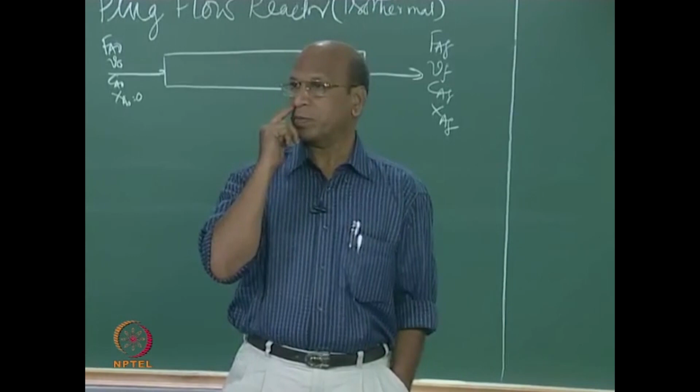Point 931 meter cubed. 1.5. How are you able to manage different answers for the same question? All the data is exactly the same. Huh? So great, I say. Even science is not exact. We thought only God is not exact, because it can be described by anyone in any form. But science, at least, we thought one can define exactly. Right? Newton's law, whether you do IIT Madras, IIT Bombay, or IIT Kanpur, it is same. It should not change. So, but I think here, what is the problem?

Correct answer is around 7 meter cubed. 7 meter cubed. Yeah, so you thought it is a very large value and then you did it. So you thought so like that? Okay, yeah, check again. I think the correct answer will be around that. It is of course a slightly complicated problem.

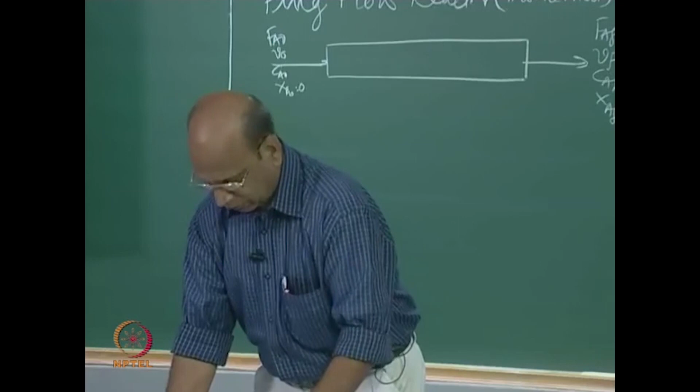It is a reversible reaction, and also there is the other timing and all that you have to add. I think you will get the reaction time. How much reaction time did you get, by the way? Yeah, I think around 5000 seconds is the correct answer. Yeah, around 4920 seconds. Yeah, still you manage such a low value.

If the reaction time is right, you only have to add another 1800 to the reaction time. 5000, around 5000 is okay. Yeah. Huh? That may be, I think, when you are taking that other value slightly this way or that way. Huh? Yeah, and then you have to add that 30 minutes, meaning 1800 seconds, or you can convert that into minutes and then add.

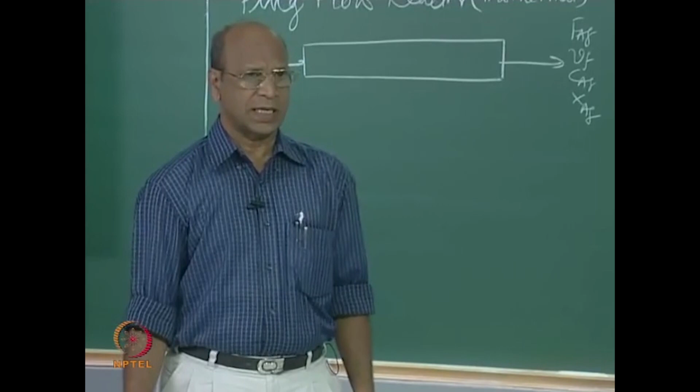So then divide by the total production rate, number of batches, and per batch, that is all. Correct, no? How many number of batches? That is too much, sir. What do you mean by too much? It's around 13 batches. Yeah, around 13 batches. Mass per batch. Then it becomes up to 100 tons per day, sir.

The answer should be 0.7. That is more logical. No, you again have the 30 minutes going and all that, no? Yeah, so, but I think that is the one. 7 meter cube, around 7 meter cube, you will get maybe 6.9, 6.8, like that. Try again. But the reaction time is right.

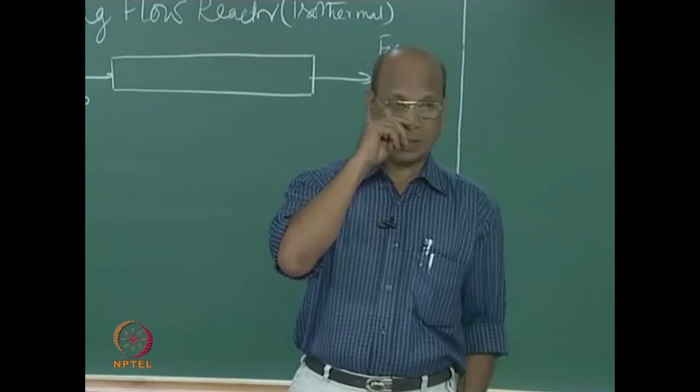I don't know how you have calculated the other things. Okay, reaction mixture density is also given. Where do you go wrong? It is probably you would have gone wrong where you have CA naught equal to, which is not equal to CB naught in this case. Okay. 13 batches also I got, but the value I am getting is 0.7, 0.74. 0.74 I am getting. I got it, but anyway, others I think, others also you try.

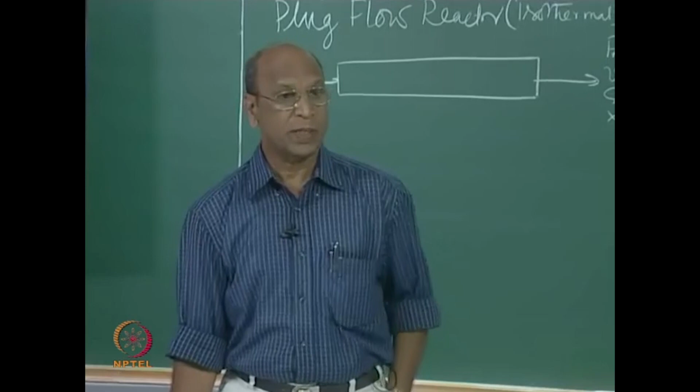I think many people, I know only 10 people would have done it. The remaining people would only be watching. Okay, I think you also do it, and then let us discuss later. Okay, so I got around 7, maybe wrong sometimes. Okay? Around 7 meters, 7 meter cube. Okay, good. Yeah, I think now let's come to the class.

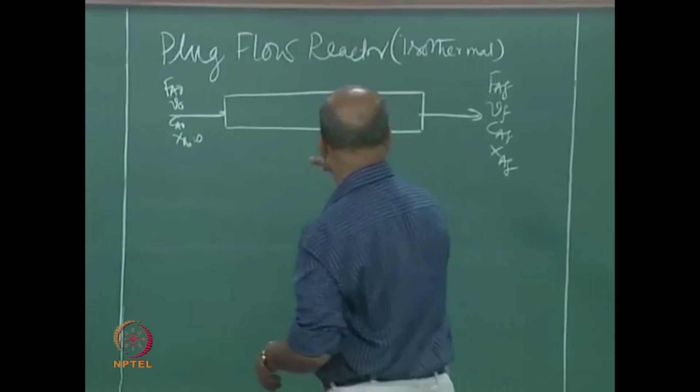Now present class, plug flow reactor, right? We have been discussing the concept of plug flow reactor, and I asked you, can you write 2 concepts in CRE? Right? That is one of the questions, the last question in that zeroth test, the first day when I gave that test. Okay, there was no answer. This is one of the concepts.

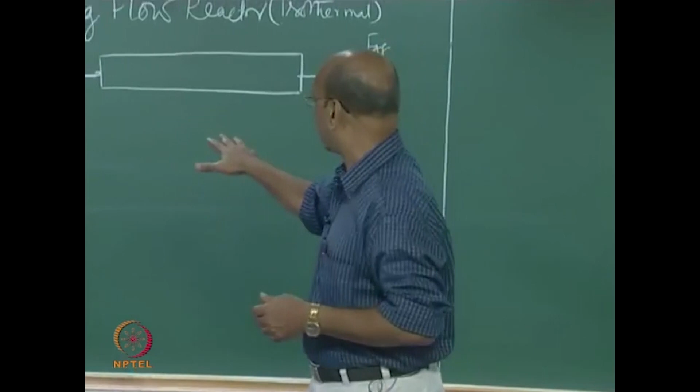Concept means something you imagine in your mind, and then based on that you develop all the equations, and then you try to find out whether your original assumption and the actual calculations are both the same or not. If both are same, then your concept is right, right. So this is one of the concepts in chemical engineering, and it is a beautiful concept, plug flow.

Why it is beautiful, I will tell you a little bit later. And we said that the basic definition of plug flow is... tell me. Flat velocity. Time spent by each and every molecule must be same. So then automatically you should have a flat velocity profile.

Now, I think you have a feel for what axial mixing means. Axial mixing is like pushing people in a queue backward and forward, okay. Like that, even in reactors, because of the turbulence, and you should not confuse turbulence with mixing. The turbulence in a pipe is very limited, in the sense that it is only velocity fluctuations which we take as turbulence, whereas mixing, there is turbulence too, but mixing is a big chaos.

Mixing occurs throughout the equipment, whereas in turbulence, when you have a pipe, I am talking about pipe flow. We have to distinguish that clearly, because we have two extremes: one is mixed flow reactor, the other is plug flow reactor. In our plug flow reactor, when there is a pipe through which flow is going, the turbulence we are talking about is velocity fluctuations.

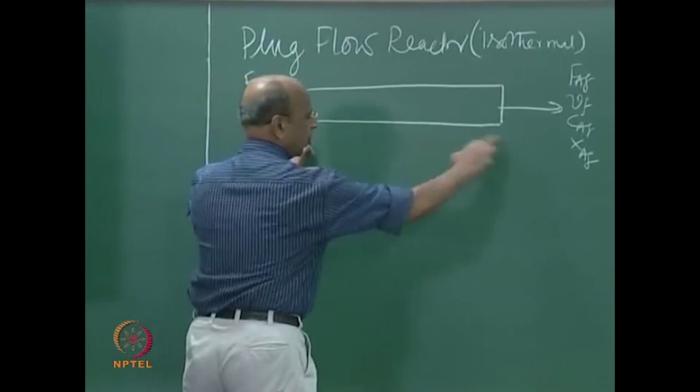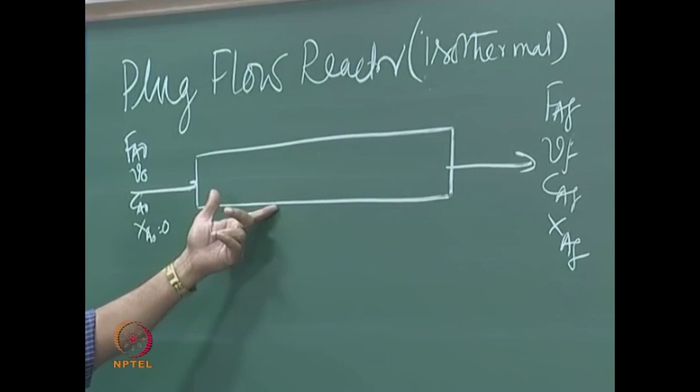Let us imagine you have provided 30 seconds for 99% conversion, for example. Around 10 seconds you will be at 1/3, but the conversion will not be exactly 1/3, it is not linear, depending on what kind of reaction you are talking about. So you will have some conversion, then afterwards again some conversion, then afterwards again some conversion.

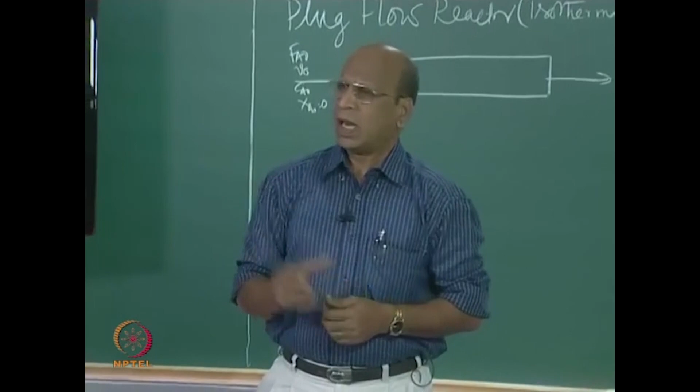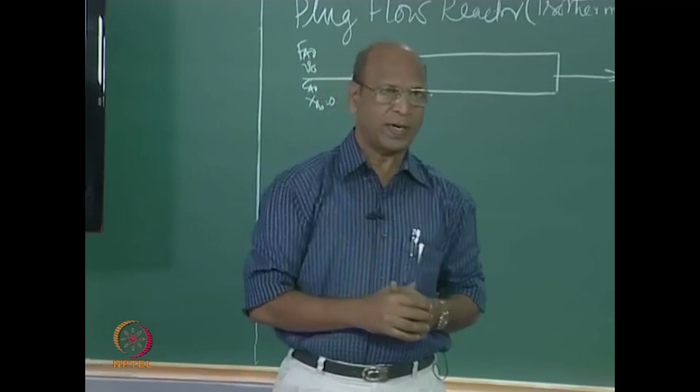But when I look at the cross section, you will have the same concentration at that cross section. That is why we say we have infinite mixing radially, and all of you would have assumed, definitely, and I think for your GATE examination also you would have prepared that infinite number of tanks gives you plug flow.

Really, did you understand that concept? Mathematically you can prove it, but has it really gone into your blood? Once it goes into your blood, only then the concepts will be with you all the time. What is our assumption? In the assumption itself you have that definition of infinite number of tanks giving you plug flow, just in the assumption, but we never go deeper into that assumption, correct?

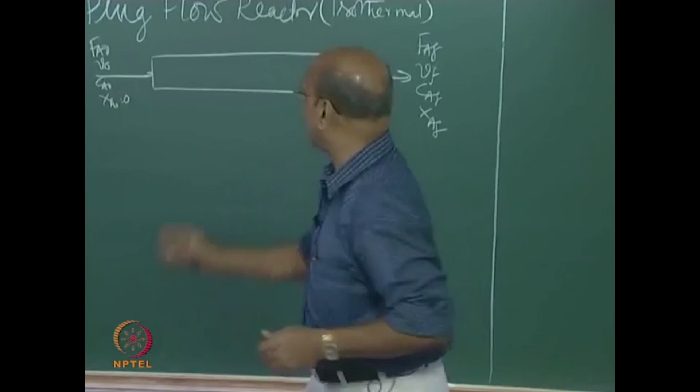So what is the assumption? At any cross section you have infinite mixing. When do you get infinite mixing? When you have one perfect mixer. How many cross sections do we have in this? That is all, that is why infinite number of tanks.

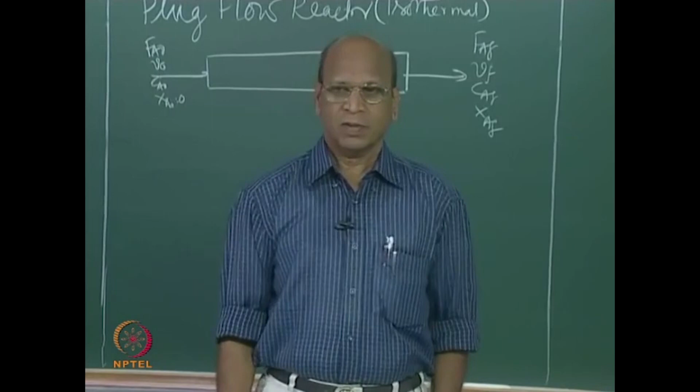Also, when you calculate for 90% conversion, plug flow gives this much volume, and for 90% conversion mixed flow reactor gives some volume, right. Now you want to use number of tanks in series. You calculate for one tank volume for 90% conversion, it will be much larger than plug flow. Then you take 2 tanks, what happens to the volume?

It decreases, to some extent, that we will also do as an example later. Then you take 3, it further decreases, you take 10, it becomes very small. When you go to infinity, that will be equal, the volume size will be equivalent to almost 0, where you are defining the radial length, the transverse direction, that radial dimension.

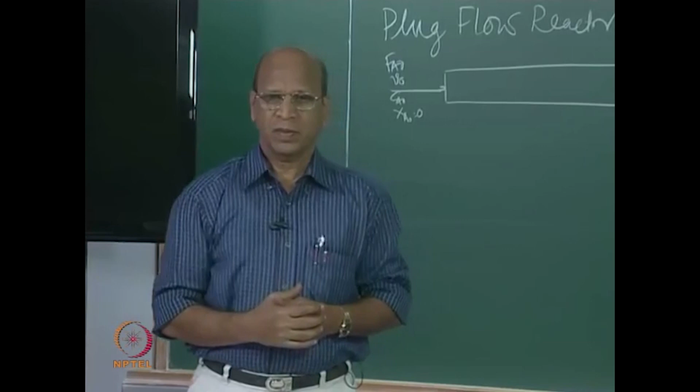You see how simple it is, I do not need any mathematics for that. This is a favorite topic for many examiners also to be given: prove that infinite number of tanks give you the plug flow equation.

You take first order and then write some equations and try to prove it. You do not have to really prove it, of course mathematically, since there are still some people who will not believe words. So that is why for them mathematics is required. Then you go for mathematical proof and say that yes, what I imagined and what I also mathematically proved, both are the same. You see how simple it is to remember now, very simple to remember.

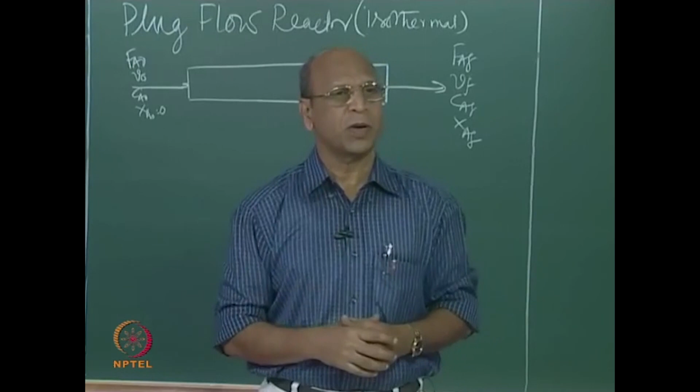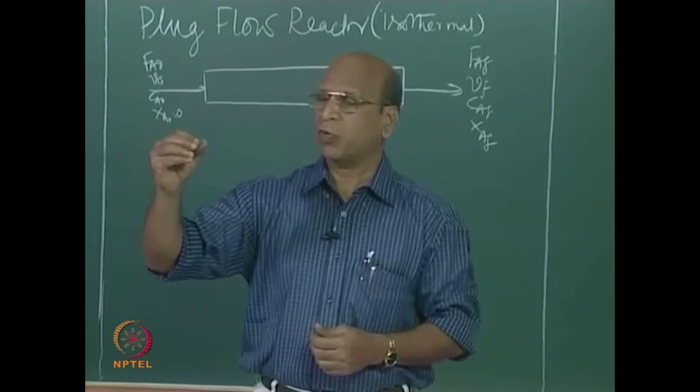Why should infinite number of tanks give you plug flow? It is in the definition itself. Normally we do not think beyond the assumption of flat velocity profile. If you think a little bit more, then it will be radial direction mixing equal to infinity and axial direction mixing equal to 0.

But I think I may give in the examination: prove mathematically that infinite number of tanks will give you plug flow, that is different. That is the mathematical examination, but conceptually it is very simple, because I am taking sufficient time, since the entire reaction engineering is based on only 2 reactors. Out of that, the second assumption, the mixed flow assumption, is very simple for easy imagination, whereas this one is not that simple.

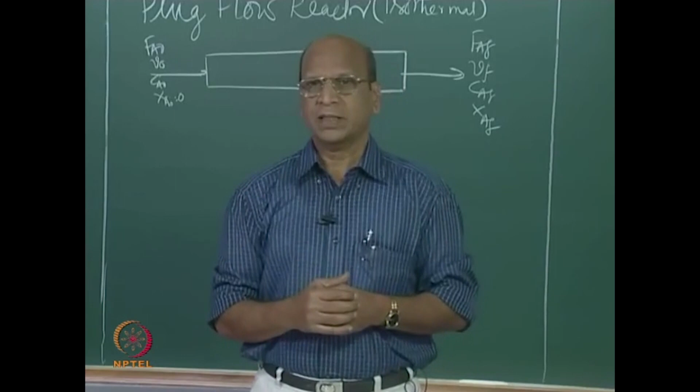Like parrots we repeat, because my teacher repeated that it must be flat velocity profile, I will also go and tell that it is flat velocity profile. Fortunately or unfortunately, if you become a teacher, you also tell the same thing, flat velocity profile. So generations it goes on as flat velocity profile without trying to understand the real concept, why this flat velocity profile should be for plug flow, because the idea is that each and every particle must spend exactly the same time. For that all these definitions are required: flat velocity profile, axial mixing equal to zero, radial mixing equal to infinity, all these things are required.

So that is why you have to do that, that is only your interest. I told you there is no description of real pleasure in learning, we cannot tell it in words. There are few things which you cannot tell in words. So that is why this joy of learning is totally different, you cannot express in words the joy of learning. And the moment you have that kind of learning in you, you should not get arrogant, but I think you will be happy with yourself.

Others may not be happy that much, but you yourself are very happy if you know many things. But that should not go to your head, and then you should not belittle others, scold others and all that. But still, I think that gives you, that is why, every god must be like that.

But we see a lot of movies, and many movies are there on Krishna. I told you I am not particularly religious on anything, I do not think all are equal for me, but as an example I am telling. So he knows what is going to happen, at least in the books, what has happened and what is happening. So that means he has got all the knowledge, and you can see how he will smile also very carefully. That smile will not be laughing like me, ha ha ha, he will never, Krishna will never, because other people will laugh like that, Duryodhana may laugh like that.

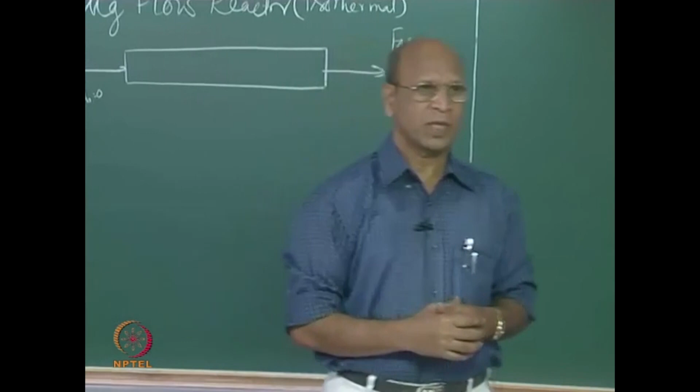We are only trying to draw some fraction of it, one millionth of it, from that source. If you really truly believe in God, I believe in nature, I think so. That is why what we are learning is all from nature, and the entire research is only to crack nature.

Just to find a small thing of what is happening, how clouds are forming, big problem, big research problem, how they move, why those shapes, they are not beautiful circles or beautiful triangles or rectangles, all different kinds of shapes. You look at a cloud and imagine that it must be a beautiful girl, it looks like a beautiful girl, or you look at it again and say it must be a beautiful bird, then it looks like a beautiful bird, because by the by we always say beauty with girls, we never say it with boys.

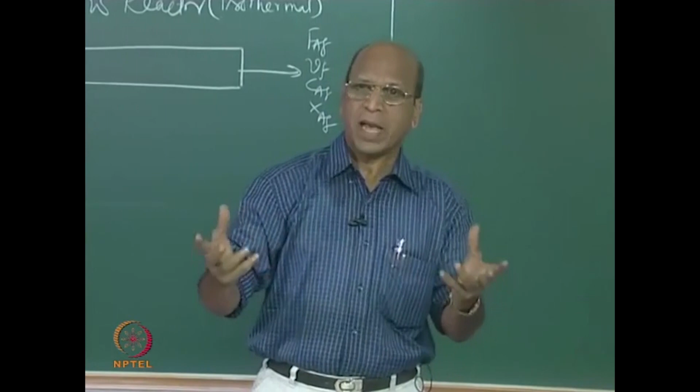You know the reason? I think on this planet it is totally different, human beings are totally different. If you take any animal, the male is very beautiful, only in humans the reverse happened. No, really, see the peacock for example, the male peacock is very beautiful. The lion, the male lion is really wonderful to see, that magnanimity, the moment you look at that, oh my God, lion. But if you see the female lion again, you don't feel that.

Every day you may be seeing, any animal which cannot see without the aid of light in the night, they will happily sleep after 6 o'clock, the moment dark comes. But that is the only time you start working.

We are also the same on this planet, life is the same. Life cannot be different because all species have come on this planet. About 90% of species only take food during daytime sunlight, and they don't do any other job. They search for food, and once they have sufficient food, they want to propagate their own species. Male and female join, and they simply propagate their species. You are chosen on this planet only to propagate your species.

If you allow humans, I think they will really pollute very fast. That's why all these restrictions are there - in China only one child, and in India it may come to half a child or something, because we are crossing China. But I think naturally they will control on their own, like other species, right?

I don't know whether you've heard the name Aris, Rutherford Aris. Has anyone read his book? If you read that, I will give you a Nobel Prize if you really understand it. Really, I think it's very very complicated. He has written the same information in terms of mathematics. But if you understand these concepts and go to Rutherford Aris's book, wonderfully you understand. His mathematical knowledge is fantastic.

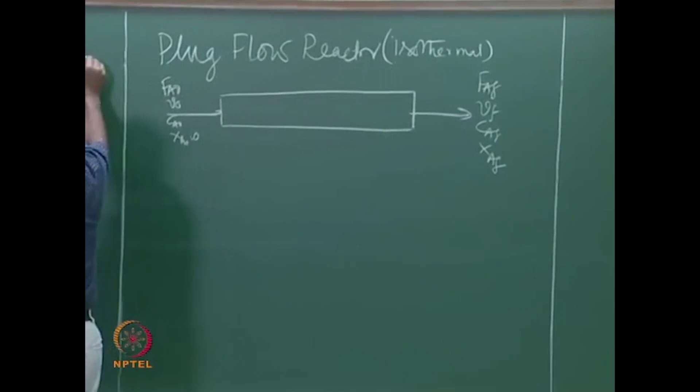I think even for conversion he uses the term xi, where most of us don't even know how to write this - you see, like this, that is xi. Xi is the conversion for him. We simply write xa, like this. What do you call that? Xi only, no? It's not epsilon - epsilon is only this, epsilon doesn't have a tail. Zeta - no, zeta is again different, it goes like this. They also have a capital form and a small form. Yeah, so I think this is xi.

That kind of complicated, but I think he is very stable, very good, and he writes poetry. Poetry comes when your mind is stable.

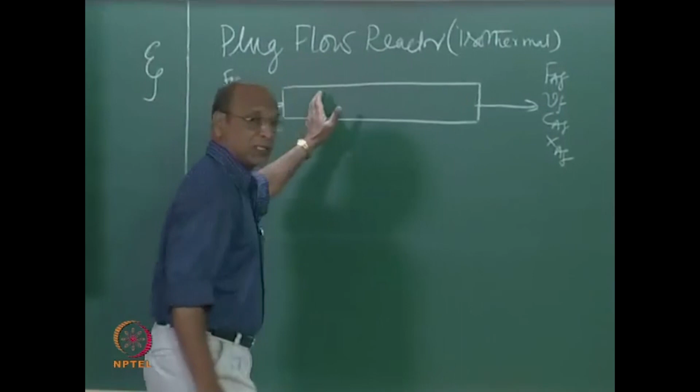Please remember that. Anyway, coming back - that's why I told you, all this started because of the pleasure in learning, that you have to taste. The moment you taste it yourself, you cannot come back. We say that you have that nectar, amrut. This will taste much more than amrut - this passion for knowledge, once you start enjoying the happiness of learning. Really, I am telling you, just try that. I don't know if even one person tries, I will be very very happy.

That is why our time is limited during our education, right? So in school you will learn something, but you don't understand. In university you learn also, but you have to do it with understanding. When that understanding comes, automatically it's fantastic - really very very happy. So for that, the only thing is you have to read and then try to understand. That's all. If you're not able to understand, ask friends, ask people, ask teachers, all that.

And you should not feel bad to ask anyone if you don't know something. If I don't know how to add 2 plus 2 equals 4, that means I really don't know that - so why should I feel bad? I can happily go and ask. That's why each and every individual is different, my learning capacity is different. You would have easily understood 2 plus 2 equals 4, I would have not. But I should not compare with you and say I can't ask because people will laugh at me.

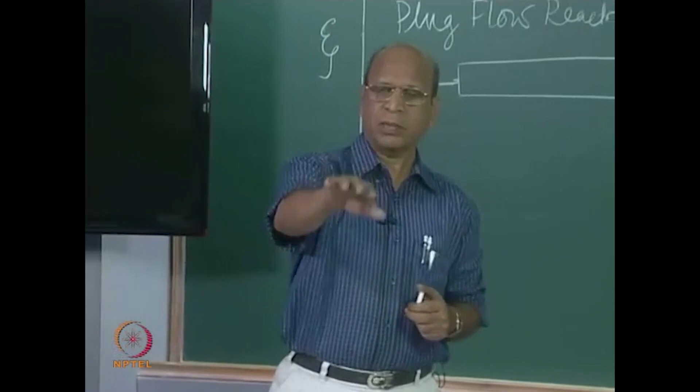You should not, because each individual is different. We say that after first class you should remember this, after second class you should remember that, after chemical engineering you should remember that, or mechanical you should remember that. These are all our own limitations that we put, but the brain will not accept that. It depends only on your capacity of learning.

And also one beautiful thing with the brain is any time you can learn. I think even a person about to die at 90 years, if he is interested in chemical engineering, he can still come and start with 'what is chemical engineering' and all questions, and then he can learn. The brain accepts that. It is not that beyond a certain time you cannot learn.

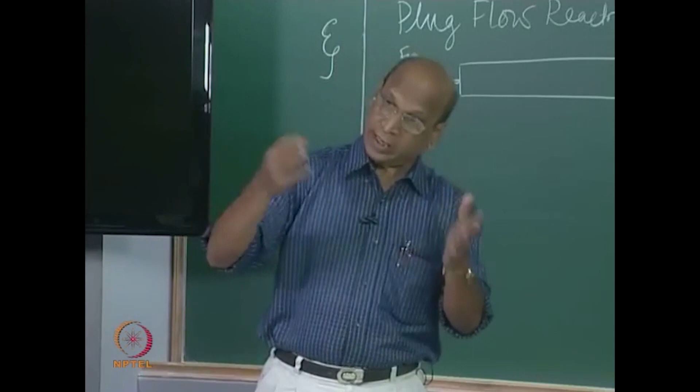That is the beauty with nature. Anytime you want to learn, you can learn - not just us, any species, otherwise you would not have survived. Learning capacity doesn't mean getting degrees, it means observing nature and trying to escape it, like when there's a tsunami, explosions, or lava from volcanoes. All species run the moment they see lightning and thunder - that is also a learning. If you don't learn and just stay there, thunder will char you, you'll become carbon, carbon 12, though I don't know its exact position in the periodic table.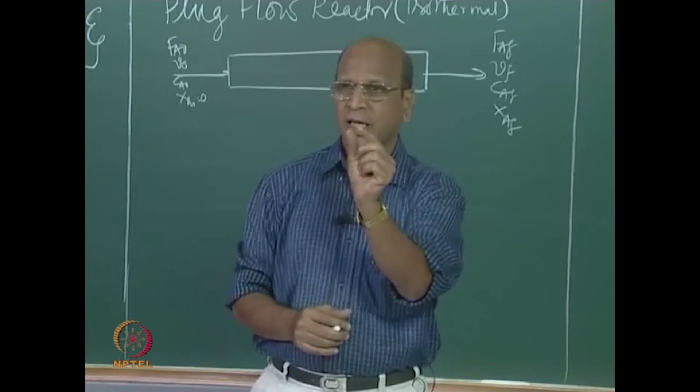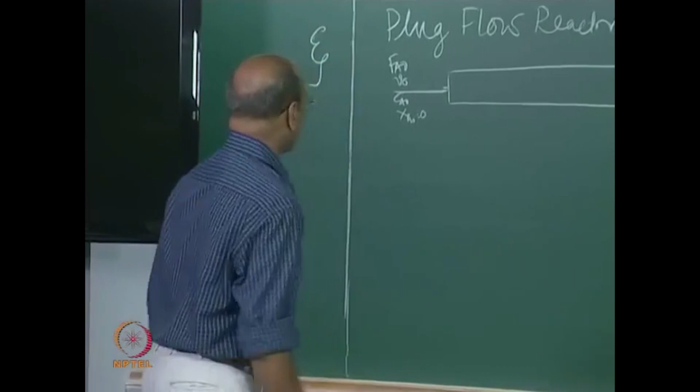I have various ways of introducing this color. One way is, imagine I have a tube, a 4 inch tube, and I take a disc of color - like a CD disc, not a hard disk, very small thickness, red colored. This is white, which is water flowing, and suddenly I introduce that red disc inside, which is totally soluble - soluble, not a hard disk. I know the total time is 10 seconds.

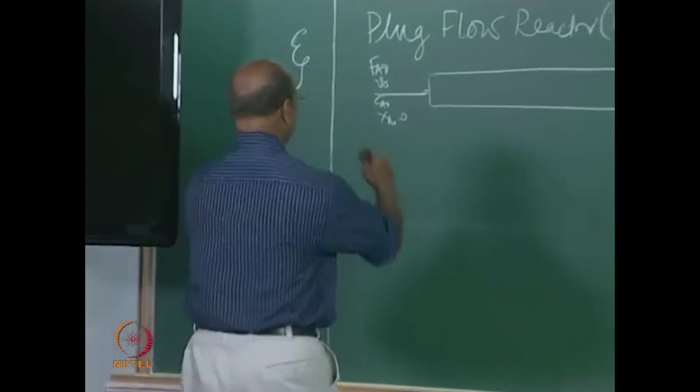How does this disc move inside as water is continuously flowing? By some imagination, I'll assume the disc suddenly enters the cross section, exactly fitting there - it's uniform cross section. Even though I've drawn it slightly bulked here and there, assume it's exactly the same cross section throughout. How does that move? It moves as such.

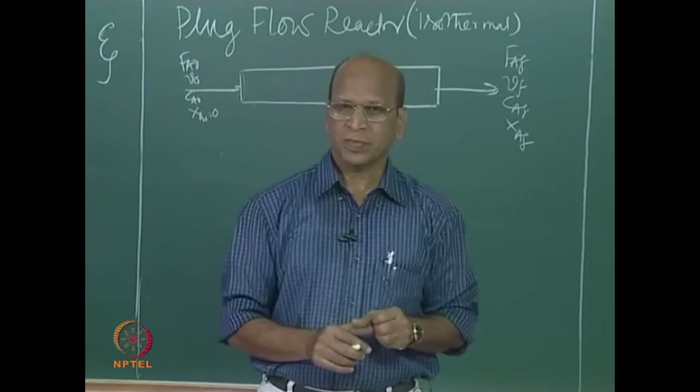Not able to imagine? Because this is water flowing - imagine a small thickness of that flow has suddenly become red. How does that move? It moves as such, like a disc, if it's ideal - and it is ideal, that's what we're talking about. How does it come out here? As a disc, exactly as a disc. That's the reason this is equivalent to your Dirac delta function.

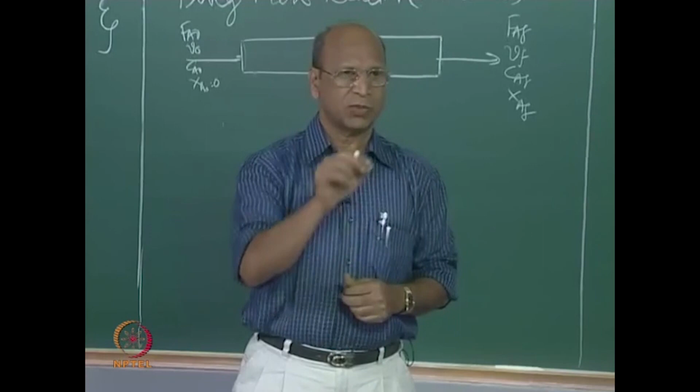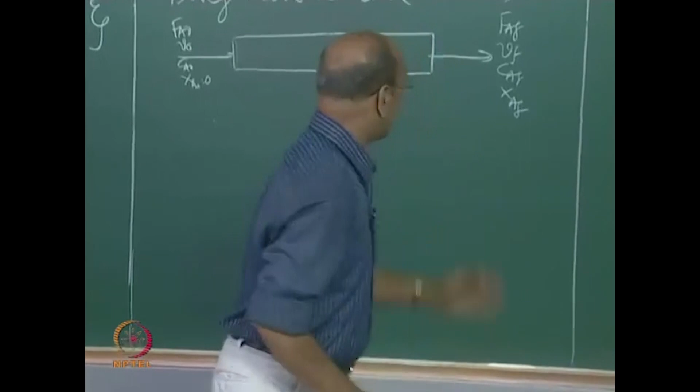That is what is called pulse input. Suddenly you introduce the pulse and observe at the end how you get this pulse. Even at 50% of the time, if you look midway, you'll see that red disc, and here it comes out. That is why we normally show the pulse entering like this and coming out the same way, not reversed. This is what is the Dirac delta function.

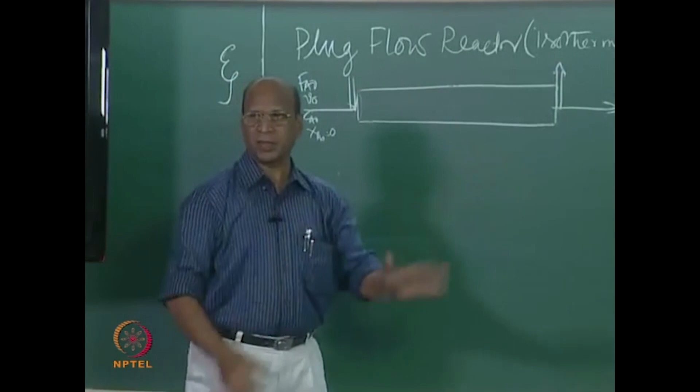This is also what I asked in another question for ideal reactors - plug flow and... what is the E(t)? For plug flow and mixed flow, what is the E(t)? This concentration can be converted into a more useful function called the exit age distribution function. Why is it useful? We'll discuss when we come to RTD. But for now, this is simple concentration.

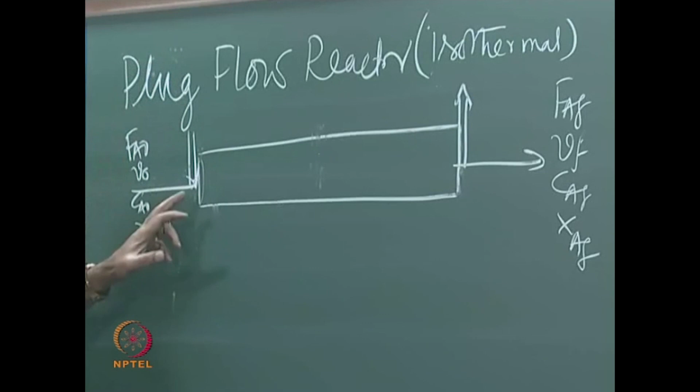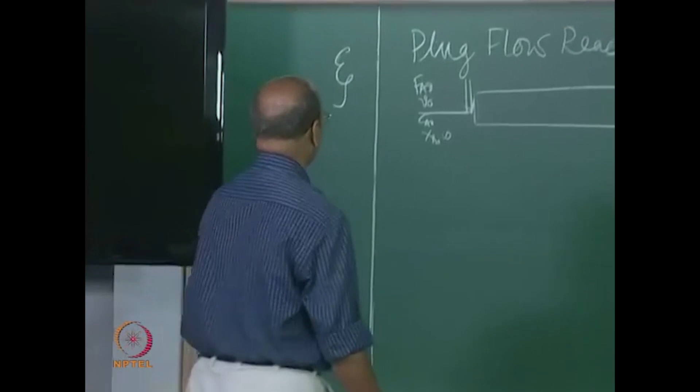Now pulse input - we've discussed this. Now let's say I have a step input. Step input means water is entering continuously, the color of water we know. Then I'll also have another stream of red fluid. At time t equal to 0, I switch off this valve, and another valve opens with exactly the same flow - no disturbances allowed. Then I allow this red fluid to enter and come out. What do you see at the end?

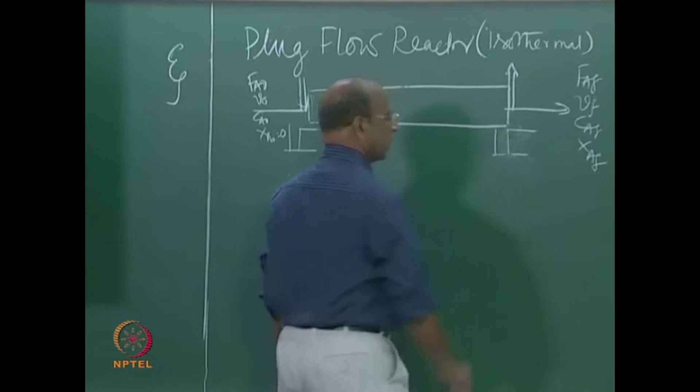After time equal to 10 seconds, you see only red fluid. That is step input - you have the step entering here, something like this, and also coming out exactly like that. So RTD is also very easy to imagine once you have this. But in reality, what happens?

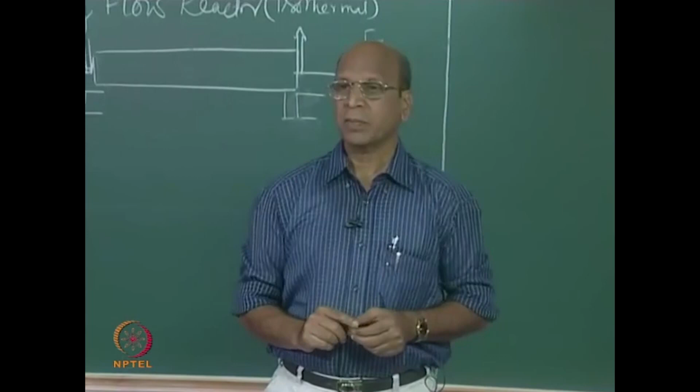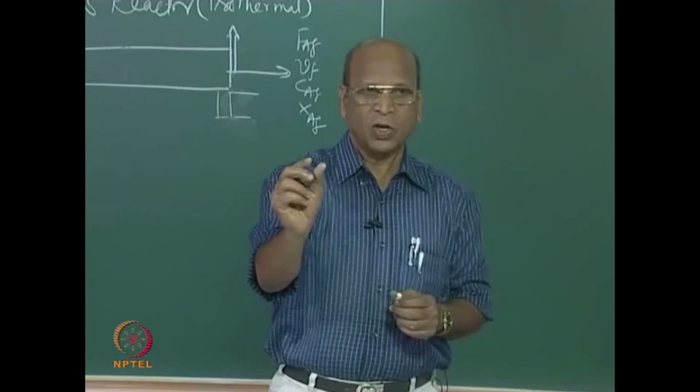In reality, we are talking about turbulence in pipes - that means turbulence in pipes is small fluctuations over the velocities. So what will happen to this disc when you have small fluctuations over these velocities? How does that spread? Because you have uniform concentration in this disc, right? So it is - more concentrated? When it comes out, will it be more uniform?

No, in the center there will be more. Center of what? Center of the pipe. Center of the disc, center of the disc. There is no pipe here, I think - it's just the reactor. If I looked at a small... okay, let me draw this.

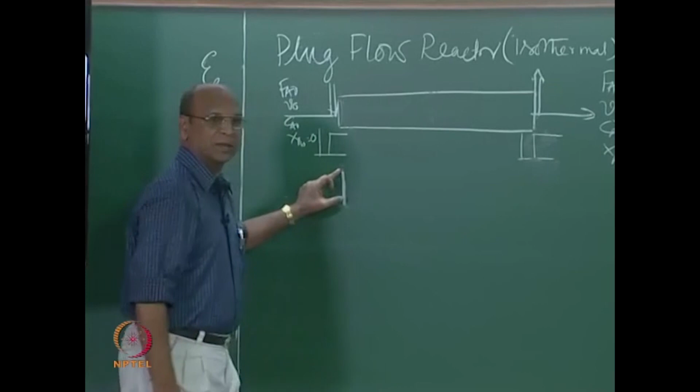This is the disc I am introducing. It should be infinitesimally thin, but if I draw it infinitesimally thin, you cannot see it, so I am drawing it with a little thickness. So the imagination is this: this is the disc which I have just entered, and this is uniform concentration throughout. When it is moving, there are velocity fluctuations around this. So how does that spread?

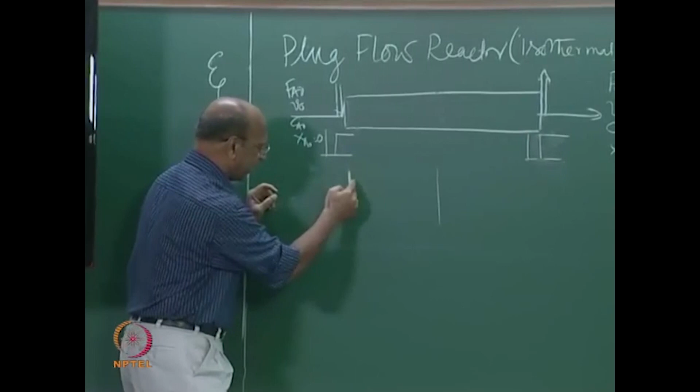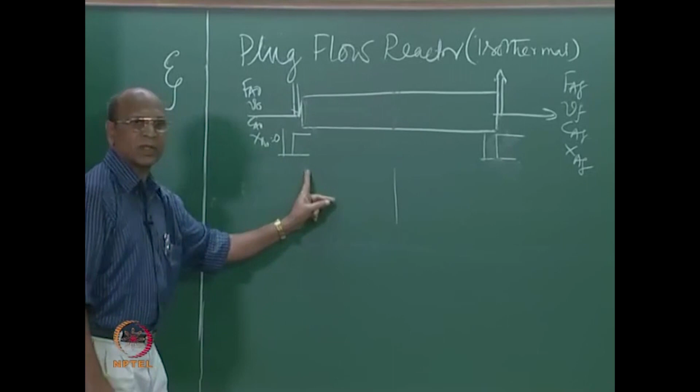How does that spread? See, what happens is the concentration at this point - because this side we have water, correct? When I imagine somewhere inside, this side we have water, but now it is moving with the velocity fluctuations. So from here to here when it comes, the concentration here is less and the concentration here also is less. So you will have

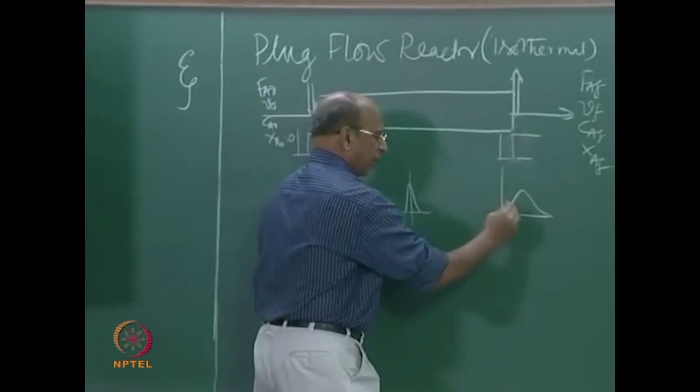like this - this is the concentration I am plotting. This is the concentration and this is the distance, the thickness of the thing. Now that pulse is slightly getting widened. So at this point it may go like this. That is what is residence time - this is the concentration, that's what we are talking about.

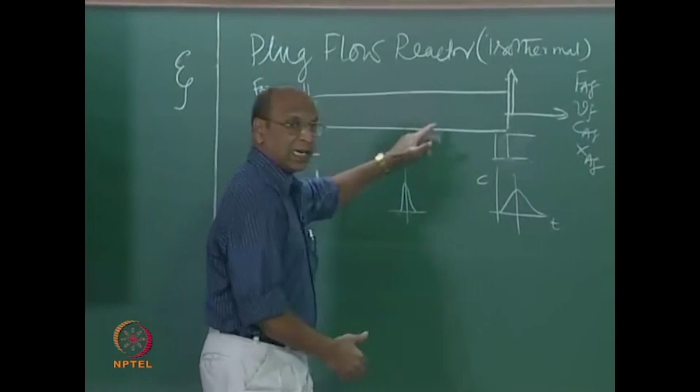If I now see this as time at this end, the molecules which are at the front portion when it is moving, those will come out first, then later the ones at the center, and later the ones at the back. That is the disturbance we have there - that is the spread in residence times.

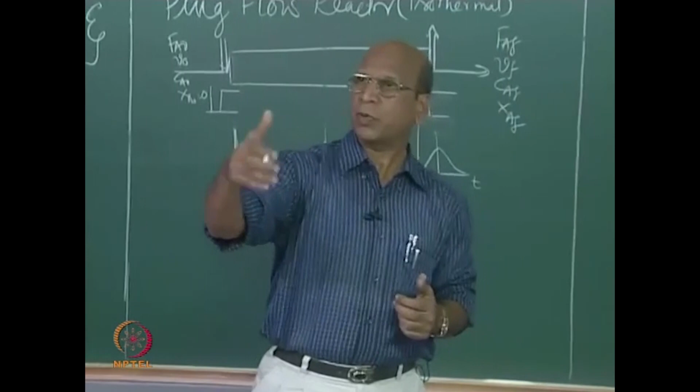I also gave you an example: when you have this kind of fluctuations, if the average time is 10 seconds, some molecules may come out in 8 seconds itself because of the fluctuations. I don't know if I gave you this example about the Tirupati queue - when you are about to see the god, you are just entering that main temple portion, then when someone pushes you, you are happy because you will just go and jump ahead before the god.

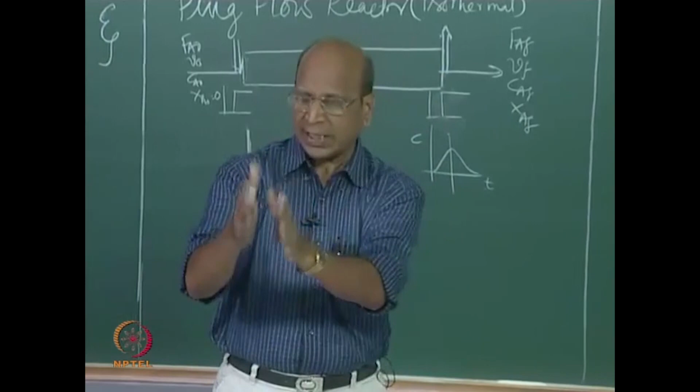That means he is able to see the god a few seconds before the person who was in line with him. He was in that line, but because of the forward-backward movement someone pushed him, so he moved forward - that is the exit for him. So he comes slightly earlier. That is why the molecules, if I have 10 seconds mean residence time, some will come in 8 or 9 seconds and some will come in 11 or 12 seconds, but that is a small disturbance.

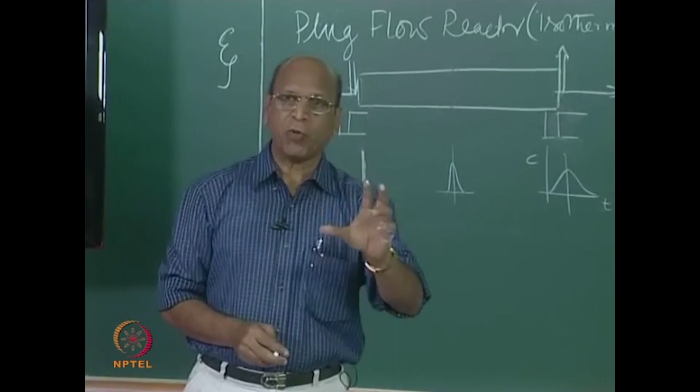That is a small disturbance, and in plug flow you will have only small disturbances because your velocity fluctuations are not large. If you have infinite velocity fluctuations,

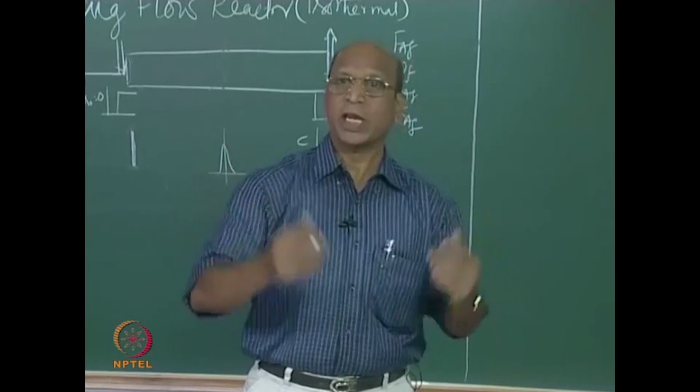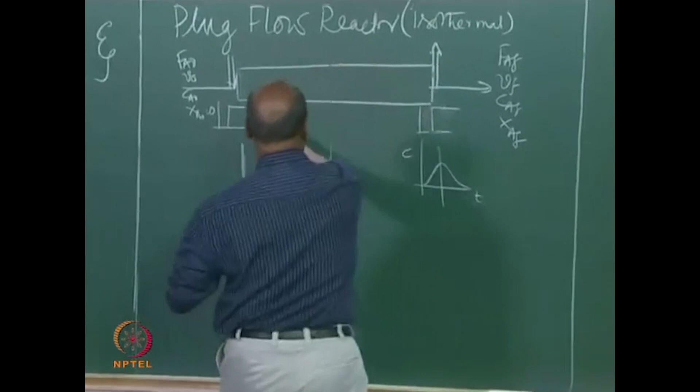that gives an excellent mixed flow reactor. Why? A molecule here is about to leave, but because of infinite fluctuations, there may be one fluctuation which suddenly takes it back here - it cannot go out anyway because material is continuously pushed in. Then again it may suddenly be pushed somewhere here. So if you have infinite fluctuations, that is what you call mixing, and then you will have the same concentration throughout the reactor - that is the other extreme.

That is the other extreme. That is all - how simple it is to remember these concepts, but the entire reaction engineering is based on this. Again I am repeating this, that is why I am spending so much time, because you should not forget this from now onwards, at least.

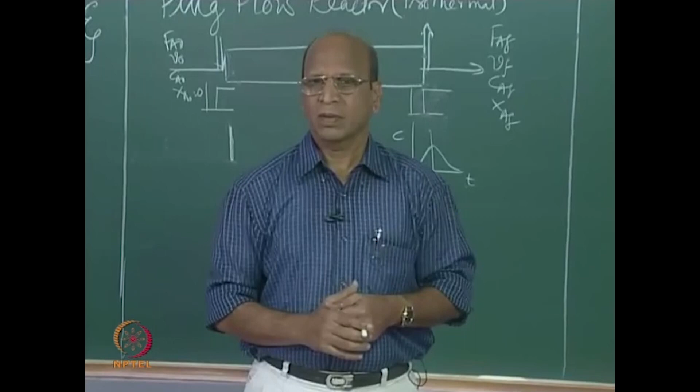That is all very simple, and for residence time distribution wise also you will have very small distributions when you have plug flow. When mixed flow comes, I will tell you how much distribution you will have there. Very small distributions only normally.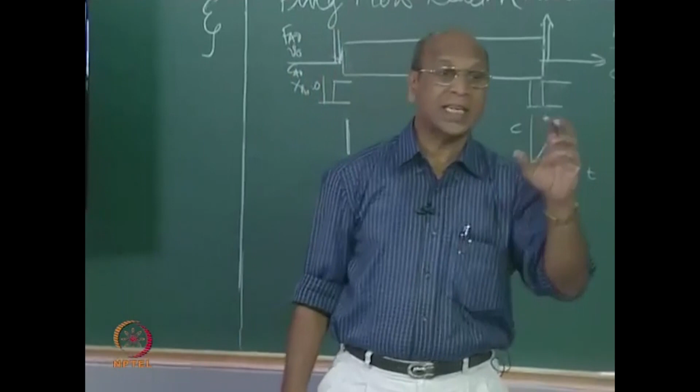That is why, to take care of these small distributions, we use what is called the axial dispersion model. Axial dispersion model.

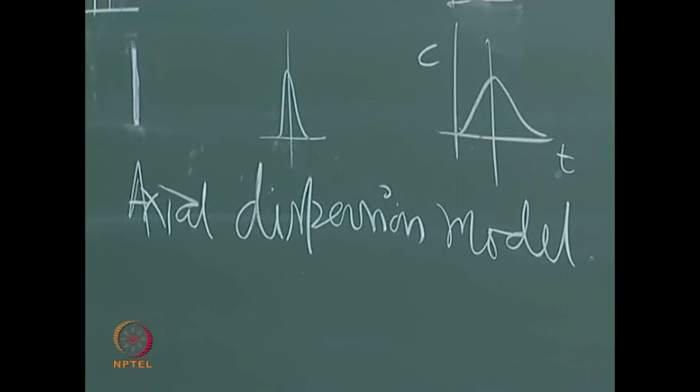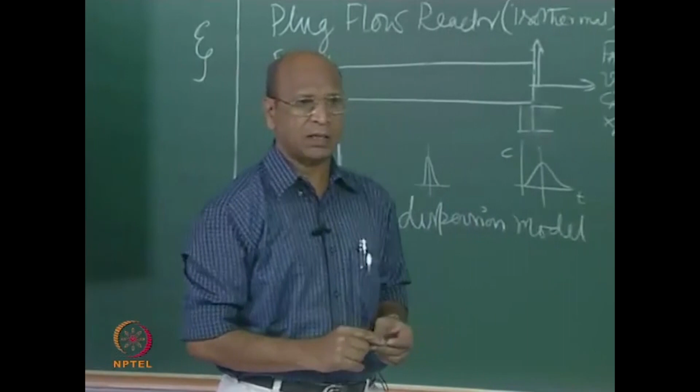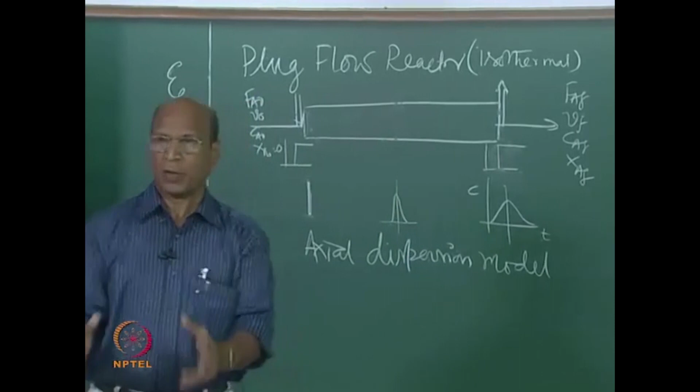Now velocity equal to infinity, so whatever length you put, zero time only you can provide - I mean exaggerating. So that is why the correct model for plug flow, ideal plug flow model, is not the correct one. Realistic model is only the axial dispersion model, but we take the ideal plug flow model first and derive the equations, to see what kind of equations we get and how far we can deviate from that.

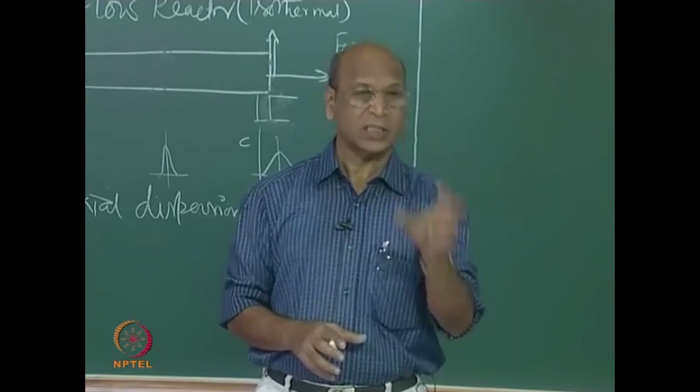Unit processes by Groggins - every day you are using his book. Groggins was the person who really pushed the unit processes name, after looking at the unit operations name. We also should have this for reactors - all chemical processes are imagined as unit processes. That is why the name of the book also is beautiful.

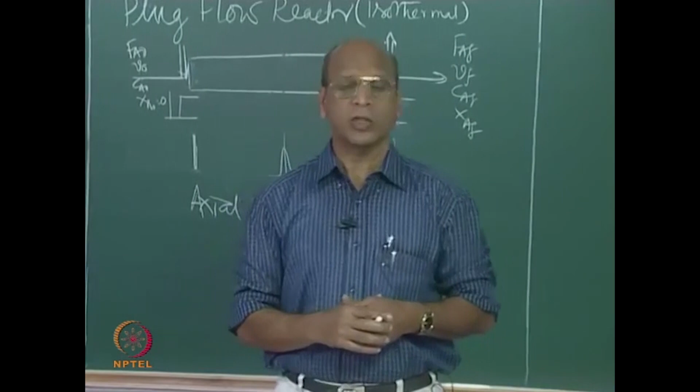What is that book? Straight away, like Levenspiel used chemical reaction engineering, Groggins used unit processes in organic synthesis - all reactions: nitration, alkylation, esterification. There are so many such processes, all divided into unit processes.

And for chemical reaction engineering, who put this name for plug flow and mixed flow - at least guess. Someone told Levenspiel, but he is not Levenspiel. Levenspiel beautifully used all these concepts.

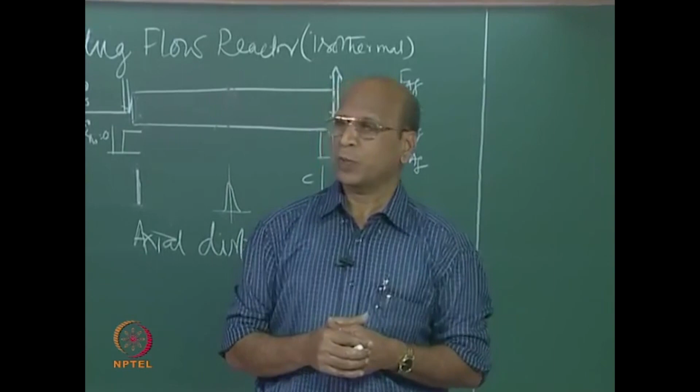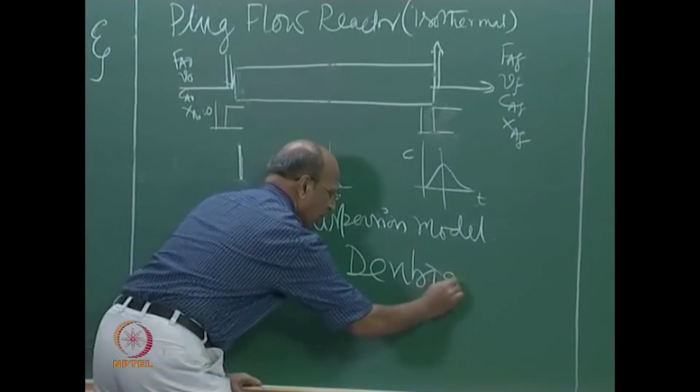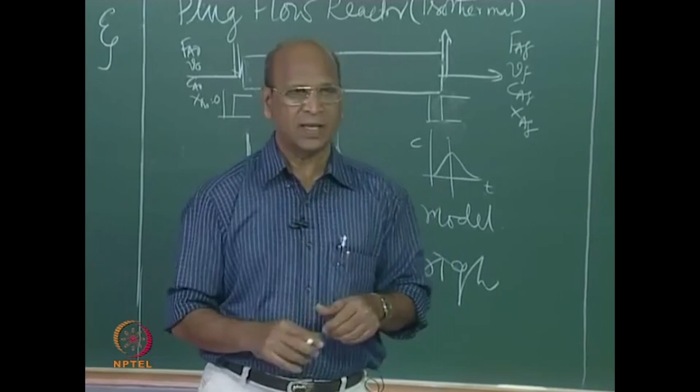Denbigh - he is the person, I think the name is given to him, that he was the one who gave these concepts. His writings are fantastic. He is from UK, I think he was in Cambridge University, but wonderful really - the way he writes. He won't use much mathematics, but he will tell all the beautiful things about the subject in terms of words only. Conceptually he is excellent.

Chemical equilibrium - name of the book. This book is maybe around 500 pages. Chemical equilibrium, wonderful book. Again, thermodynamics is most of the time abstract, and nice concepts, nice words only we have to use. That is why this book is called one of the bibles for thermodynamics for chemical engineers.

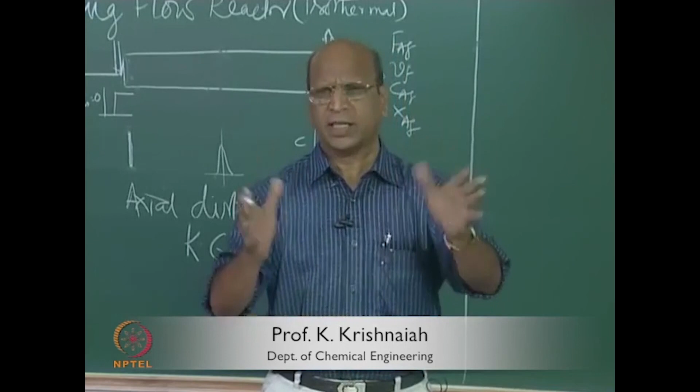So that is why Denbigh's books are wonderful - even if you do not understand, read it. If you read it 10 times, you will automatically understand, but you will not have time to read it 10 times, because all of us are only focusing - tomorrow exam, today night preparation, over. That is the problem with all of us, no? Our education system is like that. Okay, that is chemical equilibrium, one book.

Another book is Chemical Reactor Theory, an Introduction - very simple introduction. In fact, this course 'chemical reactor theory' was named after that book. It has been there for a long time, almost 20-25 years, this course chemical reactor theory. Last 30 years I think this course is there in IIT Madras, and it was named only after that book came. Small book, you can read like a novel, not much mathematics, but wonderful explanations.

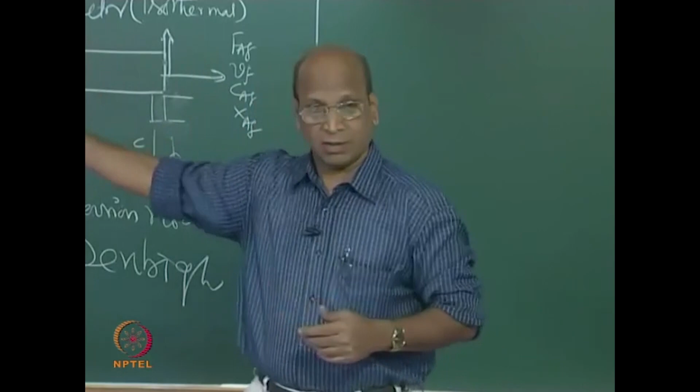Even for plug flow, he will not mention directly time as the basic definition, but he will give two assumptions and say that one assumption automatically requires this condition - that the time of each and every particle is exactly the same, like a flat velocity profile. That is one assumption he gives. So that point, flat velocity profile, will automatically be satisfied only when all particles are spending exactly the same time.